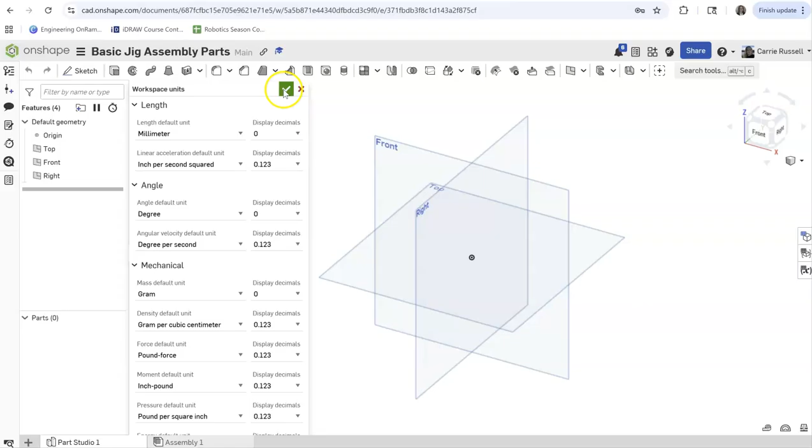So I'm going to name this Basic Jig Assembly Parts. And we're going to create a few of them in this document. So to start off with, we are definitely going to be in millimeters. So make sure your document, both there and up in your workspace units, is in millimeters. Mine is, that's the default, but I think yours is in inches.

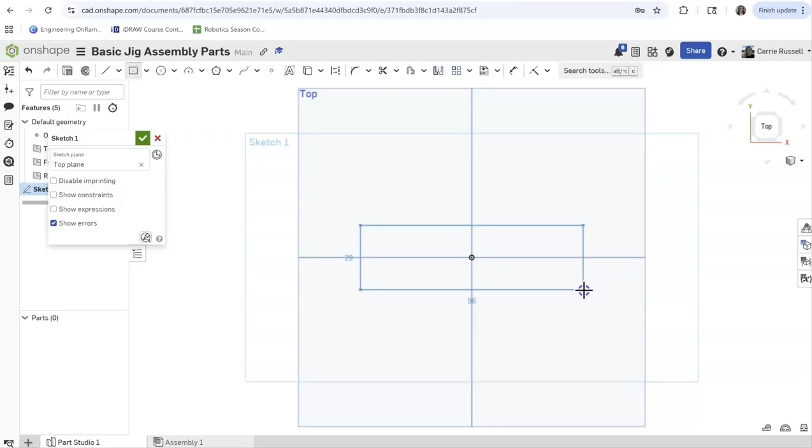Then we're going to look at the top plane here, and we'll start with that base that we saw. So we'll go ahead and create a center rectangle here. And there it is. I'm going to hit escape so we can dimension it. This part is 240 millimeters long. I'm going to hit F so we can recenter ourselves. And then we'll dimension the side view here. And that will be 50.

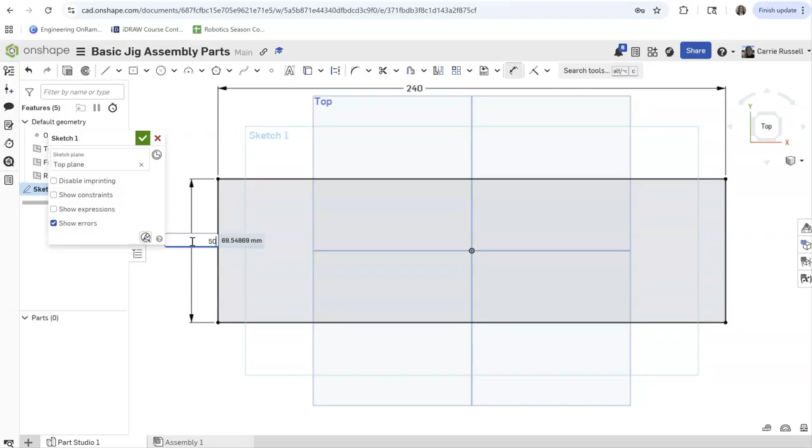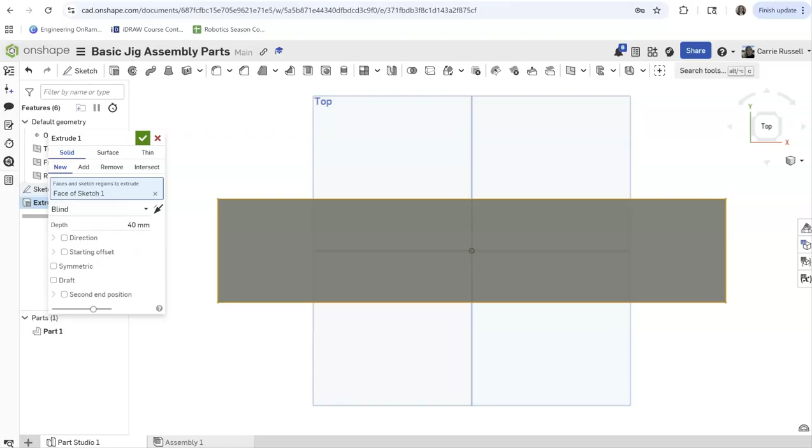And then we'll go ahead and extrude that. So I X out of my part. Let me see here. This is going to be 40 millimeters tall. Green check that. Let's look at our isometric view. And there we have our basic part.

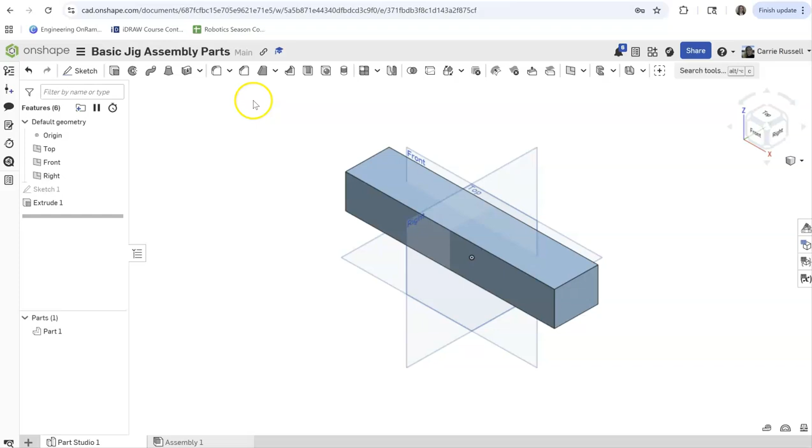We're going to put some points on the top of this part so that we can do some holes in here. So I'm going to go back to sketch. We're going to sketch on this top plane and we'll do a point. We'll just put it right here on this top. Let me switch to this view so you can see it. And I'm going to put another point. I'm just going to put it over here so you can see that. And then we'll go ahead and escape out of that.

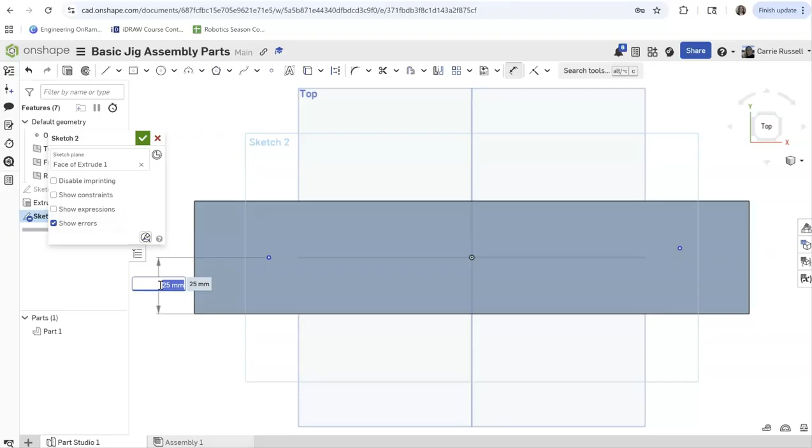Let's dimension this. So this point to the edge here is going to be 25. Mine already was because it kind of centered itself. And then from the point to this edge, we want that to be 20. And then on this side, do the same thing. And then I didn't center this one, so from here to there is going to be 25. Hang on here. Okay, so we can green check that so that we now have our positional holes.

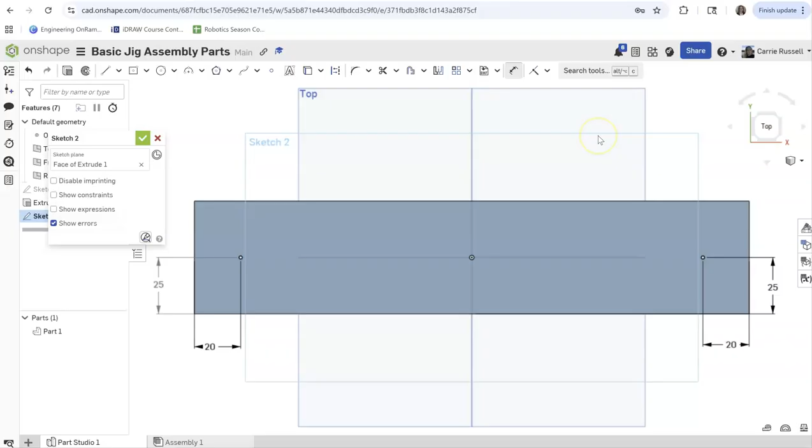And then we're going to use our hole wizard here so that we can do a simple, and we're going to go to metric, and our drill size is going to be 12. See if I can find that for us. And we really actually don't want drilled, we want what we call a tapped hole. And the length on that, we want our size here to be 12. This distance down here is actually going to be 20.

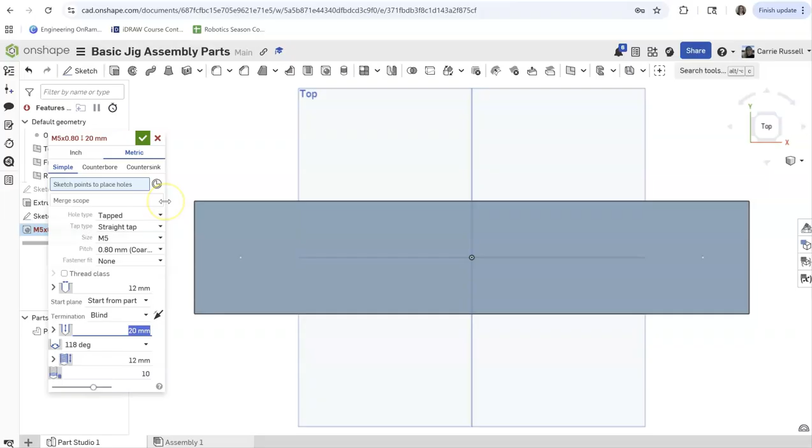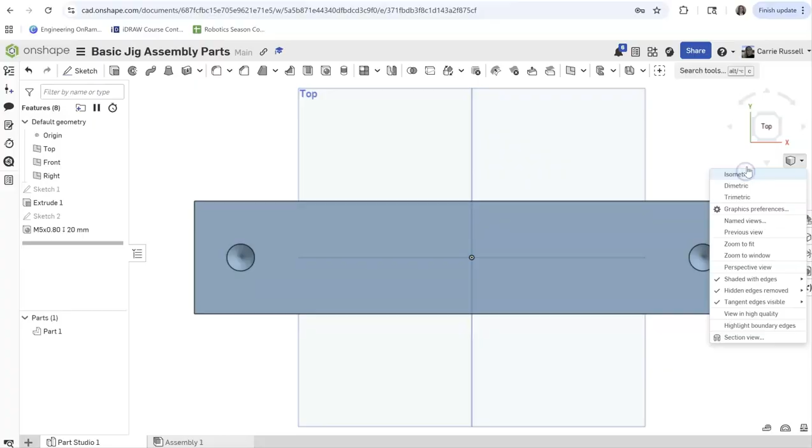Okay. And then we're going to tell it we want that hole here and here. Let's green check that and see if that is what we wanted. So I'm going to go back to isometric view. And there we go. If you look really close, you can tell what tapped means. It means that it's actually threaded in the size that we want for our bolts that are going to go into that. So on the bottom now, let's go ahead and rename this. This is going to be our base.

And we've completed that. We're going to move on and do the center plate in the next video, but in this same one, and then we'll do our side edges. So you've now completed the base for the basic jig assembly part.